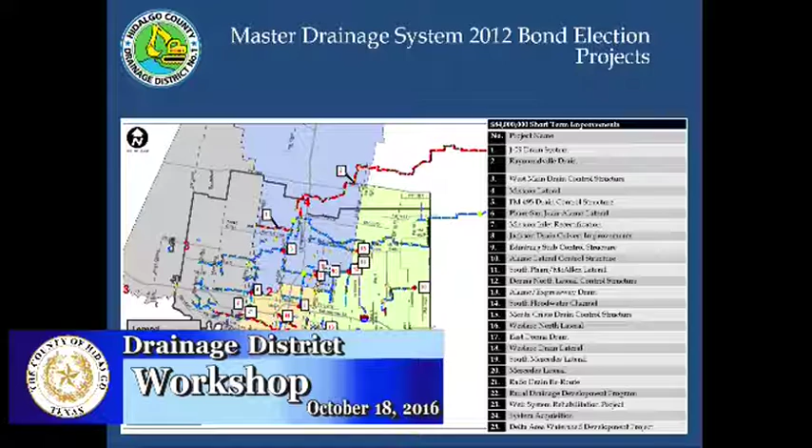This is ready to go, Chief? Okay. So the first one there talks about, it's just a slide showing the original projects that we had identified, which everyone's somewhat familiar with, Judge. This was handed out during the 2012 bond referendum that we went around, or yourself and the former manager went around and passed out. That's just a representation of all our projects that we have identified. On this, there were 25 bond projects identified, and they were district wide.

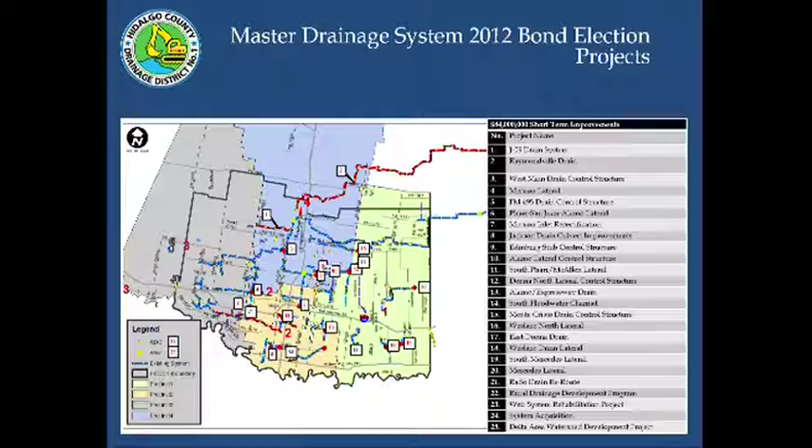The bond projects are broken down, let me talk a little bit about it before I jump into the first one. The bond projects are the 2006 project, the first bond election in 2006. Do you have the pamphlet? I don't have the pamphlet on that one. I don't know, but I think it was a binder, Judge. I don't think there was a pamphlet for the '06, but I can speak to that here in a minute. I'm going to focus on the 2012, and then I'll focus on the '06 one and some of the others we have, but my understanding is there wasn't a pamphlet done for that one. Well, if you can just provide us with a list of the projects that are going to be worked on. Of course, yes sir, I can do that.

On the 2012, we had the 25 projects identified, and out of those 25, there were sub-projects in the precinct, in the Rural Drainage Development Program, and in the Weir System Program. So we actually have a total of 44 projects ongoing at the district that are related to the 2012 bond project. So 25 was what they originally identified, and there's still 25, but there are sub-projects within rural drainage and within the Weir structures that make up 44 ongoing projects that we have right now.

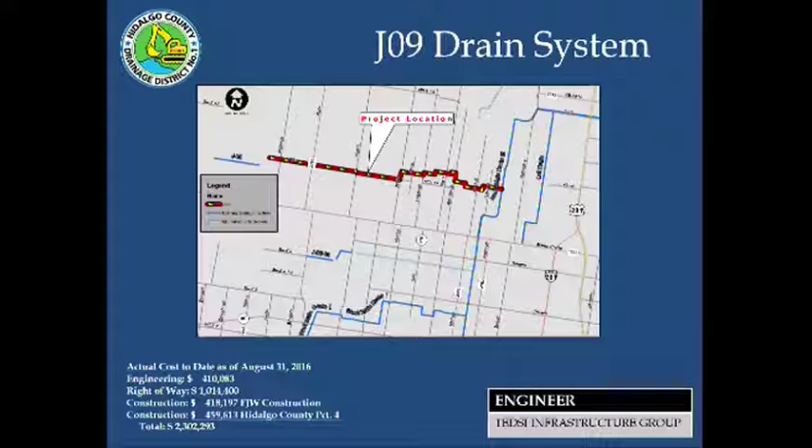Part of the extension of what I just mentioned on the storm sewer system, expanded to the existing residential development on Rio Grande Care Drive, was actually designed in-house and was added to the contractor's contract as a change order, so we have that in place now. We have definitely drainage improvements where we didn't have any before in an area that was greatly affected last year.

The next project on the list is the Raymondville Drain, which has been ongoing for quite some time now. We firmly believe this project will have a big impact on our area, directly and indirectly. Directly to Precincts 2, 3, and 4, because they'll divert water just east of where Edinburg Lake currently is, and indirectly through the diversion of these waters it will alleviate the water in our North Main, greatly impacting Precinct 1. This is a regional project that I think will bring great benefit to our area.

That project's ongoing, and it services anything north of 495 all the way up in Precincts 2, 3, and 4, which will be diverted through that junction just east of Edinburg Lake. It will have a positive impact on Precinct 1 because all those waters that would normally flow through our current North Floodwater channel would not flow there anymore, accommodating a lot of the laterals coming into it, creating more capacity in Precinct 1 for laterals that exist and some being developed right now.

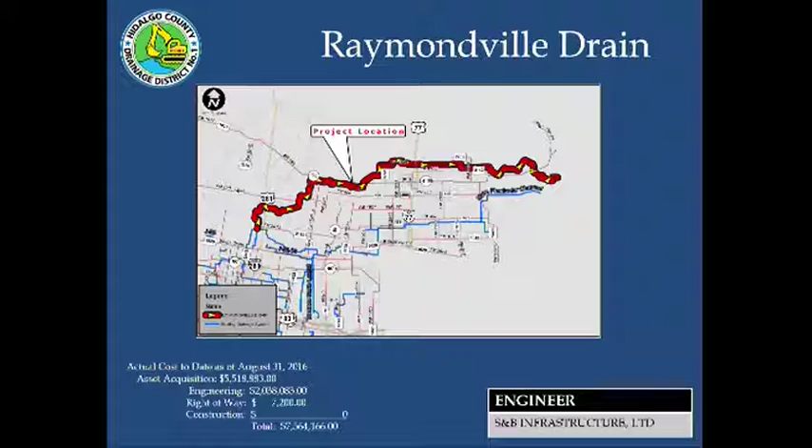It's simply a control structure that was identified on the bond to try to provide more capacity from one lateral into our main. That's basically what happened. An additional box was put in place with a gate structure, which allows a greater volume into the system, impacting the western area.

Especially the West Main Drain that I just mentioned, Commissioner, that one extends all the way west into Precinct 3. So that impact doesn't just immediately appear here in Precinct 4, it carries all the way west to Precinct 3. The more volume you can get into our main system, the better the water surface elevation - you can keep it lower to try to keep water out of the streets. That project is already fully constructed and completed.

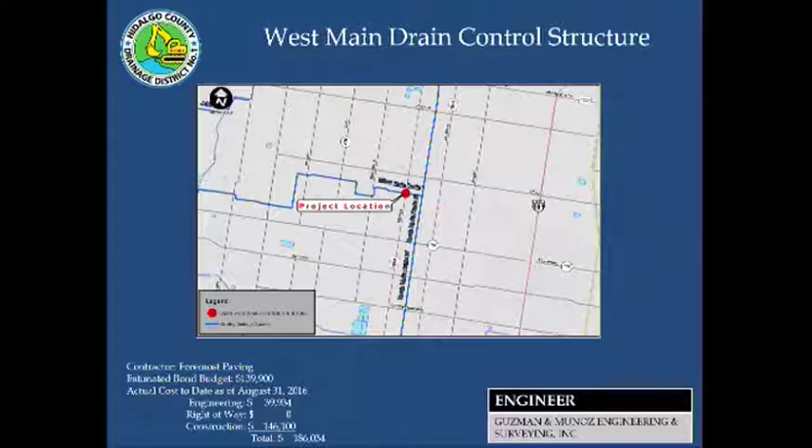Are those laterals the ones that were approved back in 1998 or 99? Oh yes, sir, we have a lot of those in place. Some of them I'll talk about under the 06, 07 partnership with TxDOT, but there were some in the late 90s. Yes, sir, some of the early ones were created way back when, especially our West Main drain that goes all the way west.

And a lot of those systems, as I mentioned - no, but what I'm trying to say is there was talk in Commissioner's Court about the laterals in Precinct 3 and Precinct 4. You believe that? You remember that? You don't remember that? You weren't here, you were working for Phase 5, I believe, back then. Yeah, I wasn't at the county back then.

But I know we do have our master plan, the original master plan adopted for some of the identified laterals. In Precinct 3, we're looking at trying to tie those laterals into existing projects we currently have under the bond issuance, or that have been improved through GLO, also projects going in your precinct right now. So that will be a priority for the district.

We're looking to invest in Precinct 3 drainage as well because there is a need - we need to expand our system into that area to get existing development out of water, but at the same time allow for future development to come in. So yes, sir, we are looking at that as well.

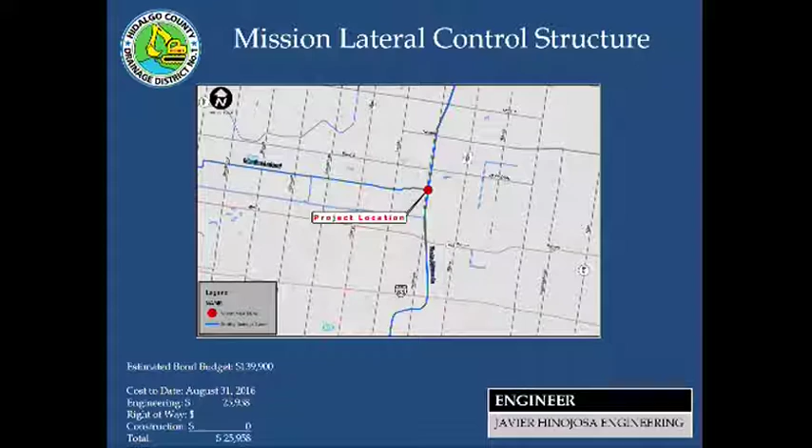So we'll move on to the next project on the list. Number 5 is the FM 495 Drain Control Structure, another control structure identified to improve the capacity of the FM 495 drain that ties into our South Main drain. They've already evaluated the improvements, and all we need is to put a backflow gate on the system since it already has the capacity of a 25-year storm, which is adequate for that area, and our main system couldn't handle any more than that. That project is being finalized and planned so we can put it out for construction.

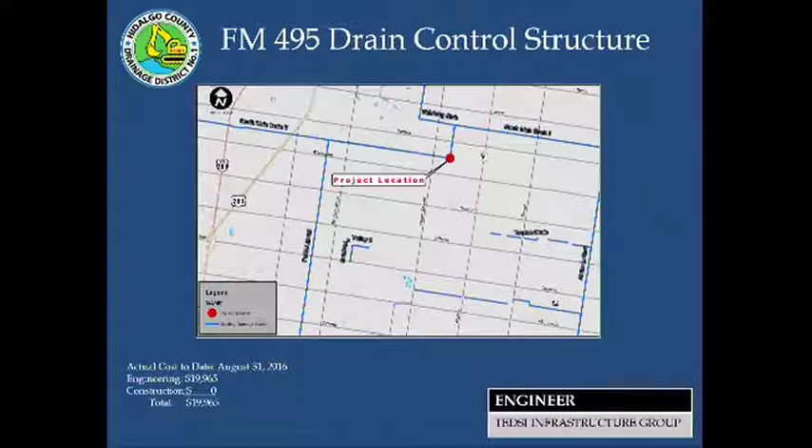The next project is the PSJ Lateral Drain Ditch Improvements, number 6 on our list. That's an improvement identified from Expressway 83 all the way north to our South Main Drain, about 4.5 miles. That project is currently under design, about to finalize so we can go to construction. The construction efforts will be done in-house to improve the capacity of flow in the drain and at the same time create more volume in the system.

That will help the areas of San Juan, Pharr, and allow more volume to be kept in the system itself. By accommodating more volume, it also helps downstream systems, because if you hold the volume upstream, the downstream systems are able to accommodate more water, which helps alleviate some possible flooding downstream as well.

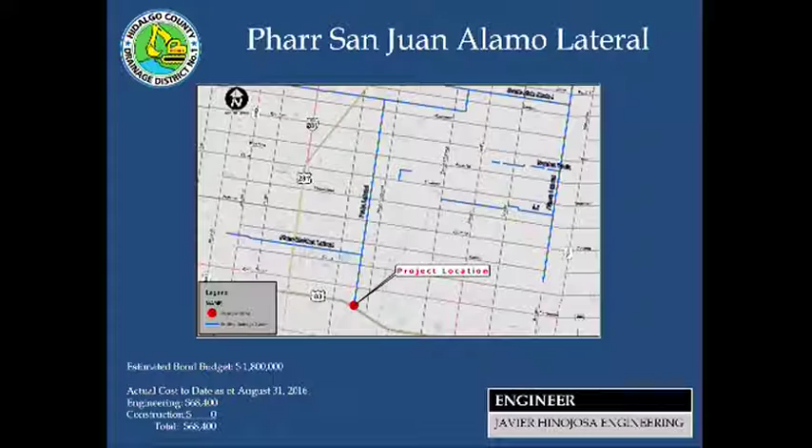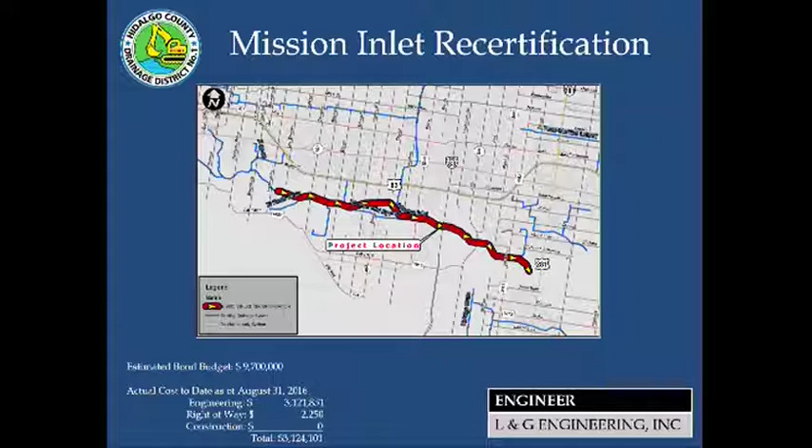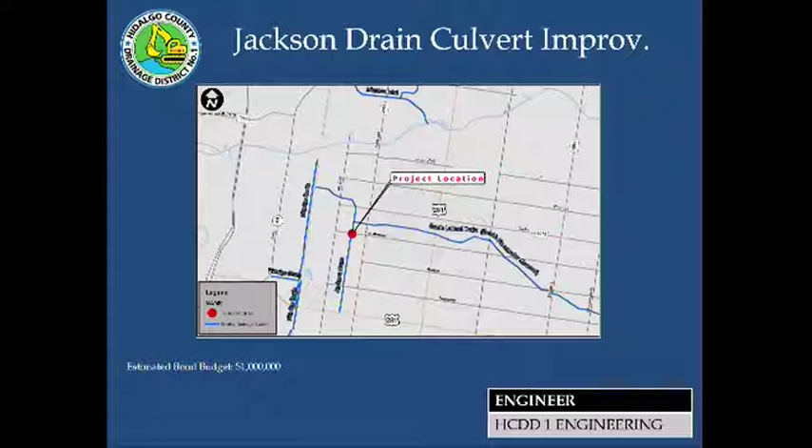We anticipate having this project closed out this coming year, and that's going to help the southern part of Pharr all the way down to 281, basically from 281 north all the way to Las Milpas. That's the south part of Pharr, the Las Milpas area, that will benefit tremendously from this proposed improvement.

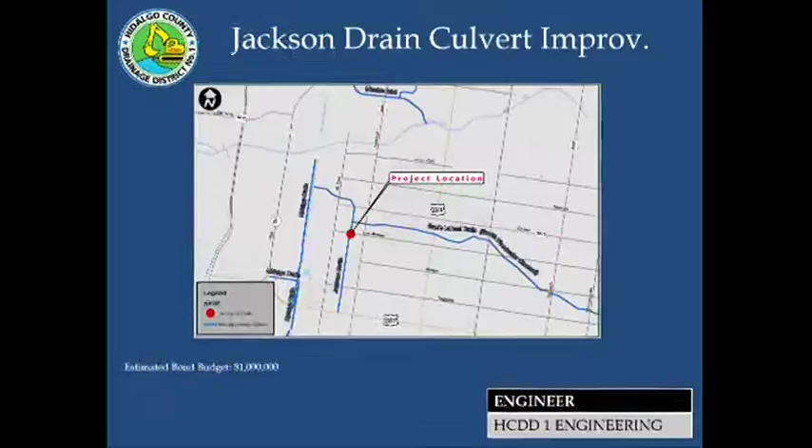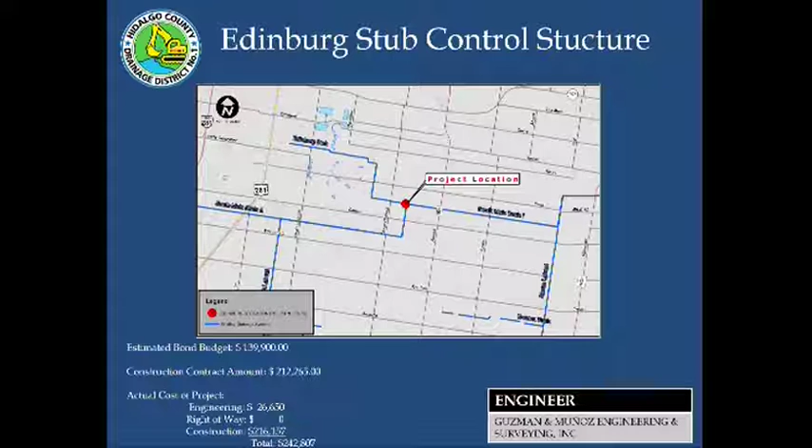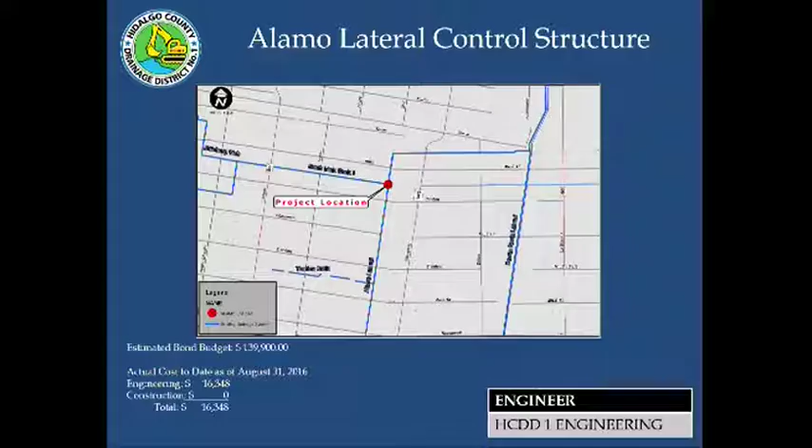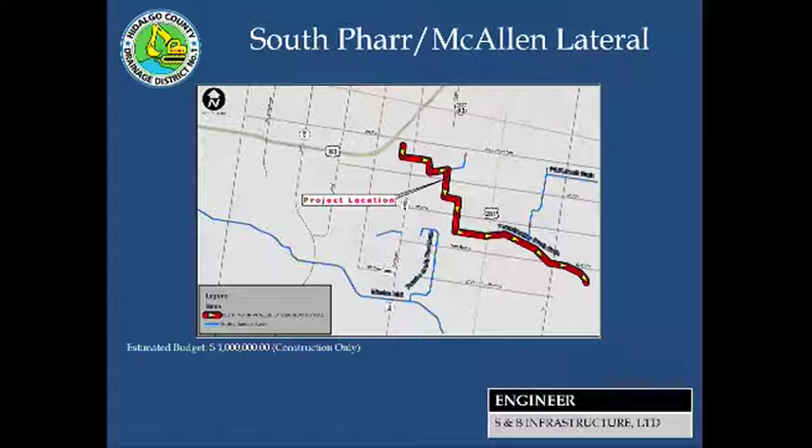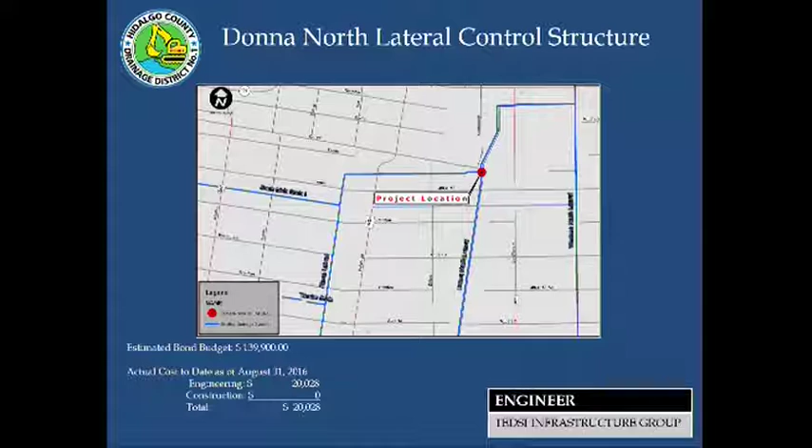Item 13 is the Alamo Expressway drain, another IBWC structure. It runs from the expressway south to the international border road, then straight south into the IBWC. This services a lot of the colonias in the southern area and rural county developments, so it'll have a great impact there. It's currently under construction and has been awarded; we're waiting on clearance from IBWC regarding the proposed gates, to make sure the specifications meet IBWC requirements. That's been submitted by the engineer to IBWC, or will be shortly, so we can re-engage the project and fully construct and finish it out.

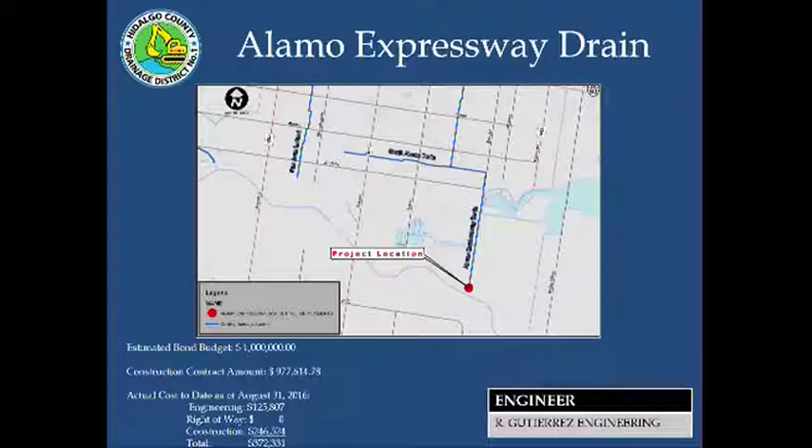The next project, number 14, is the South Floodwater Channel. This was identified as the South Fork project, along with other improvements upstream that were causing backwater issues in areas around Dicker Road and 281, including some residential areas. Part of the project was installing gate structures there, and we also partnered with a GLO project to improve the outfall structure into the IBWC. That project is fully constructed, so we're going to close it out and fulfill the bond requirements on that one.

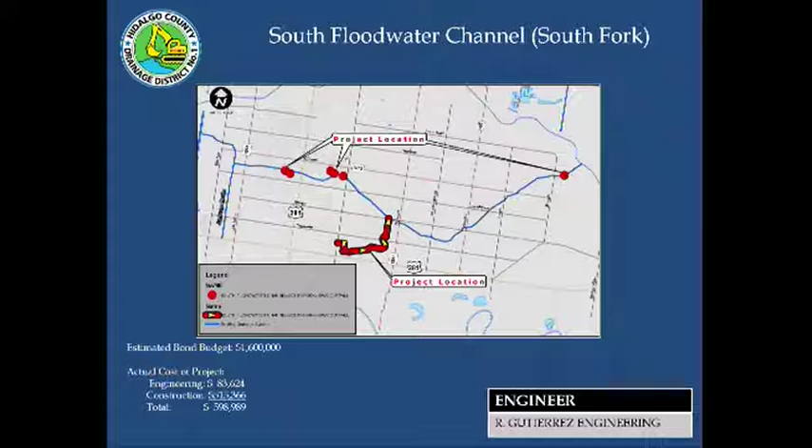Item 15 is the Monte Cristo drain control structure. The control structure will improve flow into the system itself, so we're reevaluating the size of pipe currently proposed there and looking at doing the work in-house because of the master plan for that area. There was a budget constraint when this project was initially let out, with only $139,900 allocated. The 10 by 10 boxes called for by the engineering report would require more funding, so we're considering doing this project in-house in phases, so we can have something in place to add to later and ultimately fulfill the final design recommended by the engineering report. This project should also be completed in 2017 since we're doing it in-house.

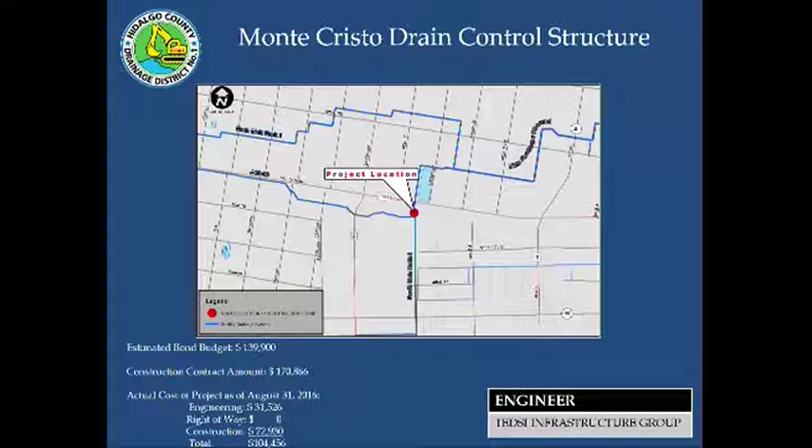Item 16 is our Weslaco North Lateral, another control structure that has already been constructed, parallel to the existing one there. It basically doubles the capacity from the Weslaco Lateral into our main, and it's fully constructed, so within 30 days we should close this project out. This Weslaco Lateral runs all the way south, draining a lot of rural area and parts of north Weslaco, so it'll have an impact on a large area.

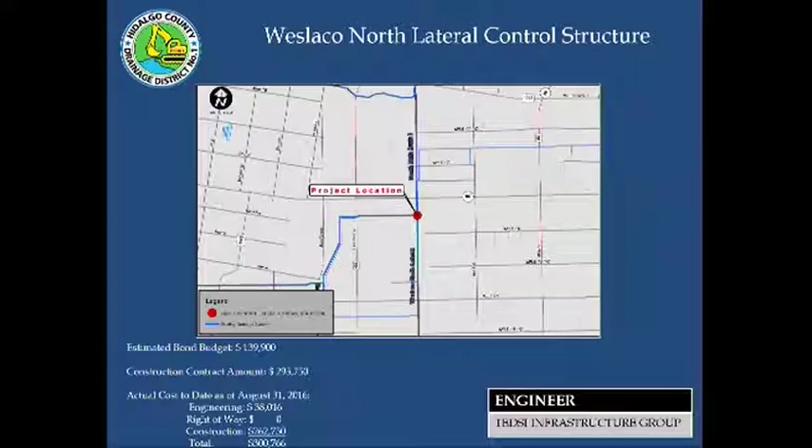The East Donna Drain is number 17. It's an IBWC structure connecting an outfall, the Donna drain that connects into IBWC. We're going to improve the structure at the actual outfall, and at the same time install platforms for mobile pumps to use whenever we have to close the gates, in case IBWC is using the floodway to divert river water.

That project's actually out for construction already, and we anticipate having this project completed by next year for sure.

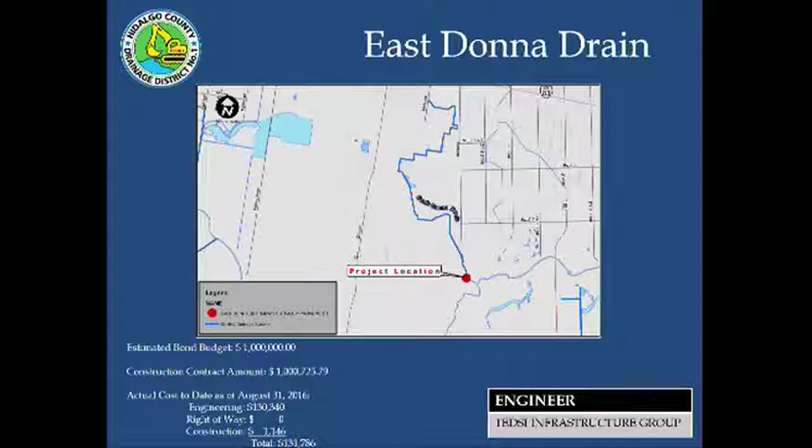The next one is the Weslaco Drain Lateral, currently proposed as a pump station to improve water flow once we close the gates. We may have to reevaluate it to see if additional structure could be installed, because this is one of the areas the City of Weslaco reached out to us about, due to issues they had last year with rain events on the southern portion. So we're reevaluating this, seeing if we need a more regional approach to accommodate an additional structure in the existing footprint of the connecting structure from our ditch into the IBWC.

So currently we're only proposing a pump structure, but the district in-house is reevaluating whether we need to modify it and put it out to bid with more gravity flow coming across the IBWC levee. We anticipate putting this out for construction next year. By the end of this year was our original goal, but based on the evaluation we may have to put it out at the beginning of next year. Either way, we feel confident that by 2017 that project will be fully constructed.

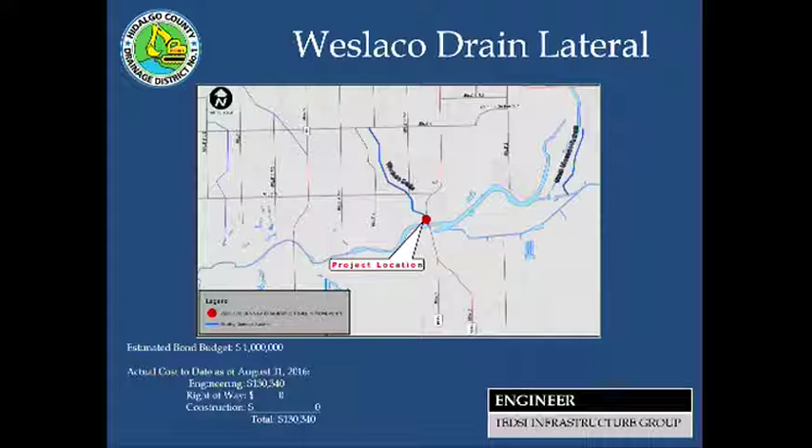Project 19, the South Mercedes Lateral, is another IBWC structure. The same thing - we're adding boxes into the IBWC for greater capacity of gravity flow, and also putting in a portable pumping station to connect pumps whenever the IBWC closes the floodway. This lateral also services the South Mercedes area, so this additional capacity will greatly help the south side of Mercedes during an event.

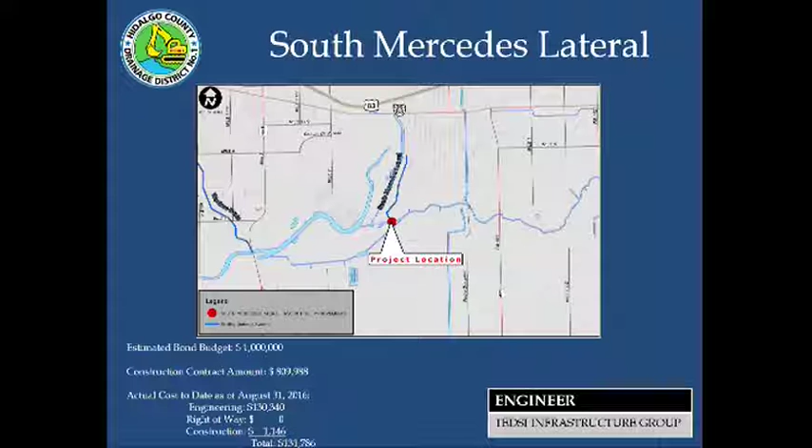That one's under construction as well, and should be completed in 2017.

The Mercedes Lateral is another IBWC structure that ties in on the east, on the north side of Mercedes, and runs all the way west and south into the northwest portion of the City of Weslaco. So it has a lot of regional impact.

We're doing maintenance and operation on this Mercedes Lateral to accommodate more drainage water in the system itself, while also facilitating maintenance of it. With this additional structure being put in, along with pumping stations for when the gates need to be closed, the gravity addition - boxes allowing for greater gravity flow - will definitely have a positive impact.

This is one of the areas where during major events, water backs up tremendously. So this additional box structure would help alleviate a lot of the issues we have after big rain events. As mentioned, this Mercedes Lateral runs all the way west for several miles, so this is a big regional impact for Precinct 1 in the rural areas, helping alleviate issues for the residential areas that connect to it.

A lot of our laterals have irrigation districts connected to them, so it's not just our main systems that are serving the area. We have a lot of irrigation laterals that connect to our main drains, and those irrigation systems service a lot of the rural areas and farm areas as well. So these improvements also benefit the residential or rural developments out there.

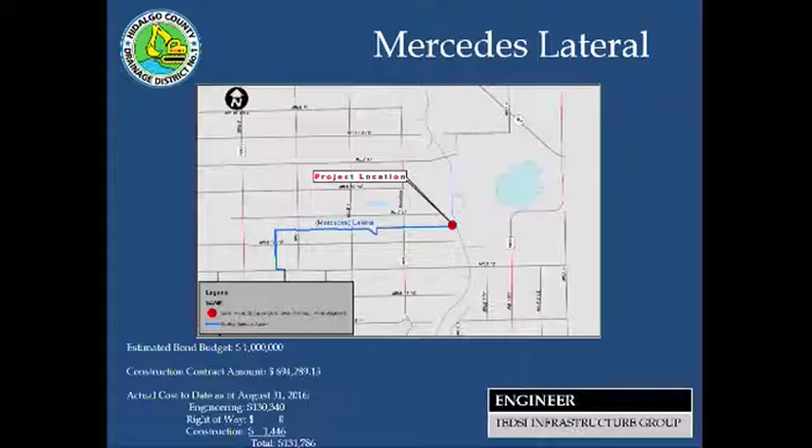Item 21 on our list is the Rado Drain Reroute project. This was initiated on the southern portion between Expressway 83 and the Mission Inlet, where there was a structure failure in that area. Because the Rado Drain serves a large portion - as I mentioned earlier - where the Mission Lateral enters east and west, just north of 495, and comes south into this area, it needed to be improved.

Because of the type of construction required, and limitations on accessibility, they went with an in-situ liner inside the actual pipe itself. That project is now fully completed, and the system is operational.

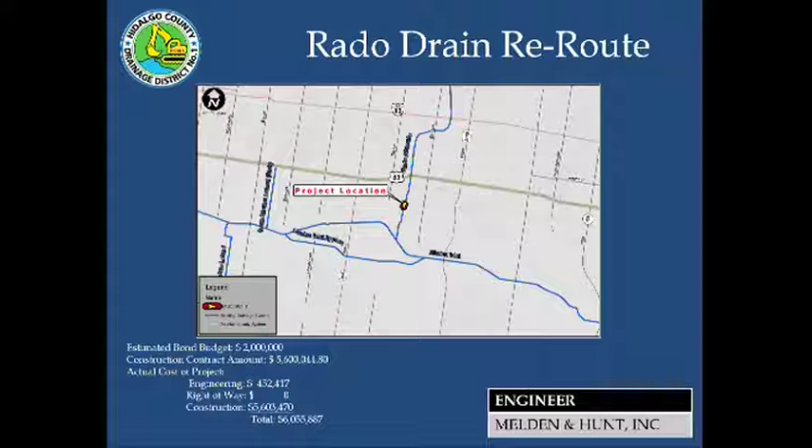It shouldn't have any issues for at least 20 years or more. So that project's fully completed.

Item 22 on the bond covers all the rural drainage projects we have, and these are the sub-projects that branch off. There was $15 million allocated for rural drainage in the bond issuance, and each precinct had an opportunity to evaluate their needs and distribute it out. Each precinct got $3.75 million to identify projects and invest in those.

Right now we're going to cover Precinct 1, which is 22A, the Adams and Black Subdivision. That's a rural development that has experienced repetitive flooding. The commissioner has paved Adams and Black, the roads, re-elevated them, and so forth. We helped assist the precinct with that effort when I was at the county. Now drainage is forthcoming to drain all that water in the areas where they've had repetitive flooding into our Mercedes lateral. That's a rural drainage project currently finalizing design, and it's an acquisition of an easement that's required before we go to construction. We anticipate having this built probably by the end of the year, if not by 2017.

The next project for Precinct 1 is Delta West. It's another rural drainage development project that also experienced flooding. We did the design in-house and put it out for construction, and coupled with Border Colonia Access money, we were able to pave the streets as well. This is a fully constructed project with outfall and drainage to a multitude of residents in that area that didn't have one before. That project's fully done.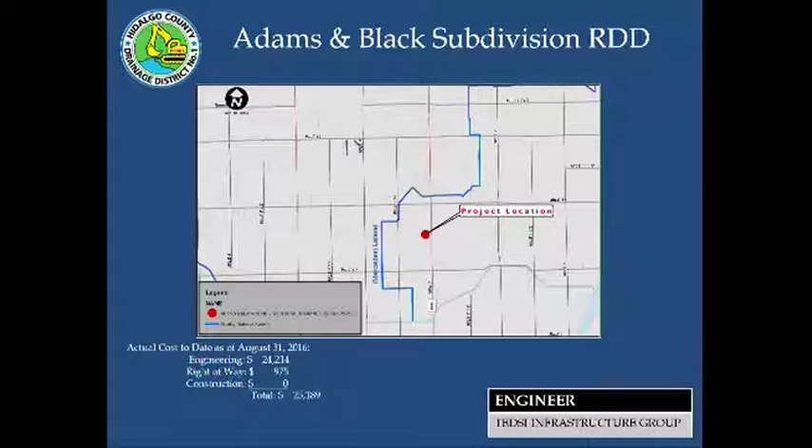Another rural drainage project is Ditch 23, a regional ditch that runs from 83 south. It crosses into Cameron County and eventually connects into the IBWC floodway. We're working with TxDOT, which is looking at improving the crossings of the ditch itself and the outfall into the IBWC. We're currently working to identify ownership of the right-of-way and to see what physical limitations we have to improve the drain that will service a lot of this area south of the Expressway.

That ditch does go north. The red ditch is Ditch 23, but north of the Expressway, it goes all the way north into part of Precinct 1, servicing some rural subdivisions in that area. With these improvements, it should provide a positive outfall for that area. That's currently being researched and prepared, and the engineering report is being developed by the consultant. Once that's developed, we'll make the determination of what type of improvements are needed to continue the project forward.

Another one for Precinct 1 is the Lucero del Norte Rural Drainage Development Program. Again, this is another subdivision that's experienced flooding in the past. We're going to be improving a crossing at our Mercedes lateral and putting drainage infrastructure in the development itself, where there's a very limited system currently. With the new improvements and the improvements in the channel itself, it will definitely help alleviate flooding in that area for that development also.

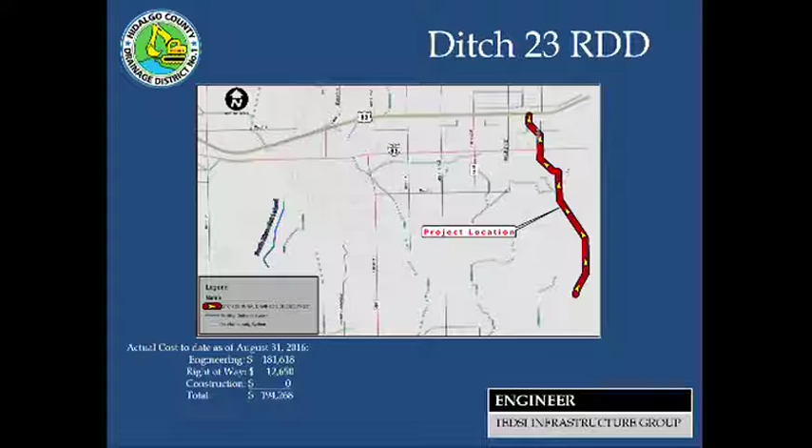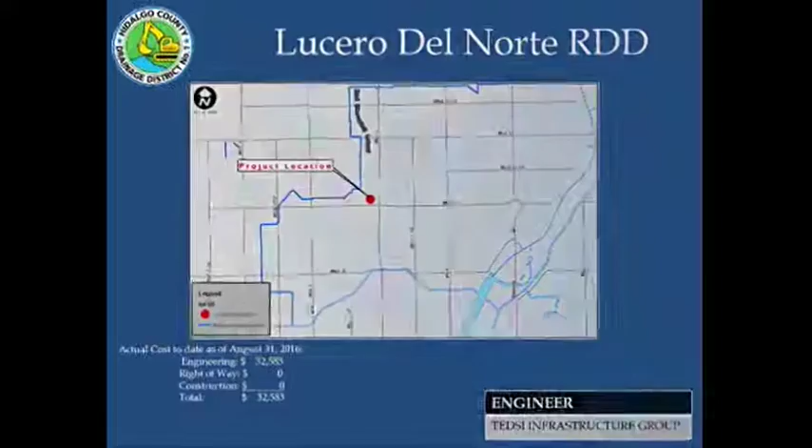Lucero del Norte is the local subdivision there, and it's been affected. The Mile 13.5 and 1015 rural drainage development area will definitely alleviate the flooding with the improvements we put in place.

We are also developing plans for an internal street funded by FEMA with recovery monies received by Precinct 1. There's a partnership in place to improve not only the drainage but the streets in that rural subdivision that has had repetitive issues.

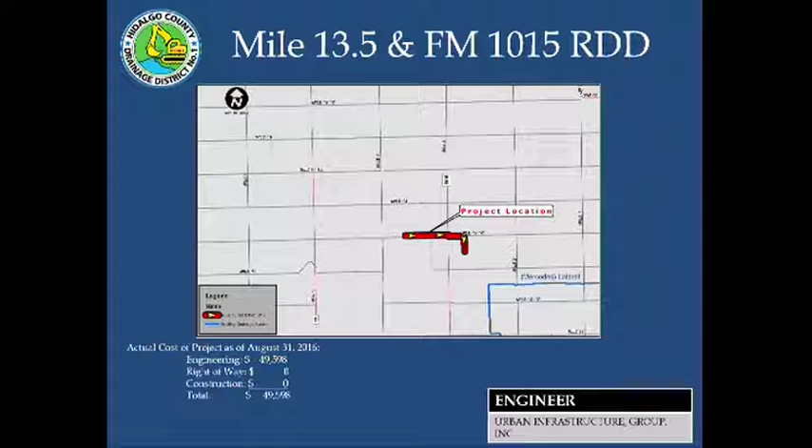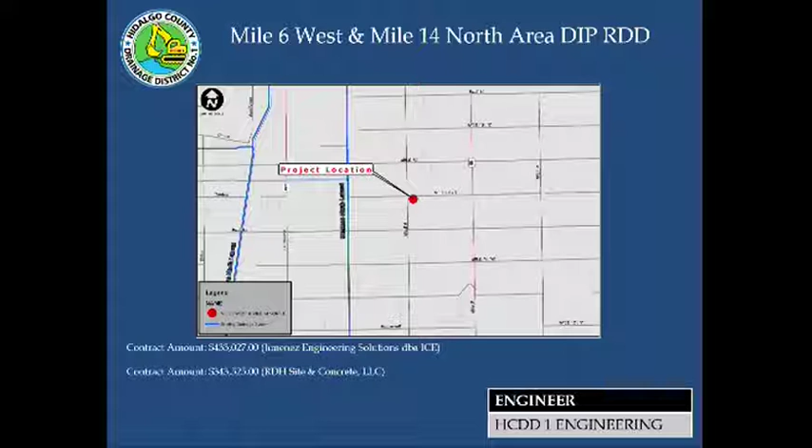The next one is mile 6 and mile 14 North Area Drainage Improvement Project. Again, this is another area that was greatly affected during previous events, and we're currently under construction right now. Once that system's been put in place and the improvements downstream are conducted, partly by the contractor and partly by the district, it will definitely help alleviate a lot of the flooding in the area. Currently the system they have in place is inadequate. With the new system, they should see minimal flooding in the streets in that area as well.

The next project that we have, rural drainage for Precinct 1, is Old River Road. Again, it's another area that was heavily hit during the last event. It's located on the south side of Donna, and that system does eventually connect into our South Donna drain, where it connects into the IBWC structure that is part of the bond issuance being improved right now. We're looking at the need to improve certain crossings. The engineering report is being developed by the consultant, and once that report comes in, we will evaluate what crossings need to be improved and either seek funding or perform some of those in-house to alleviate the flooding. So several rural subdivisions in the River Road area that were greatly impacted will be in a better position once we put in the drainage system for this area.

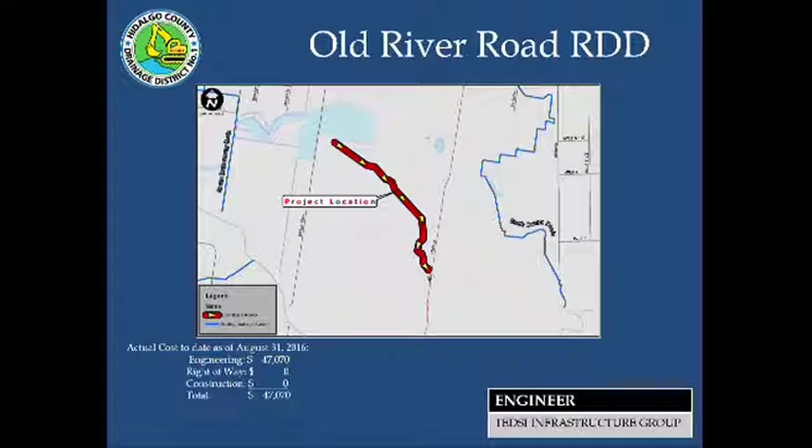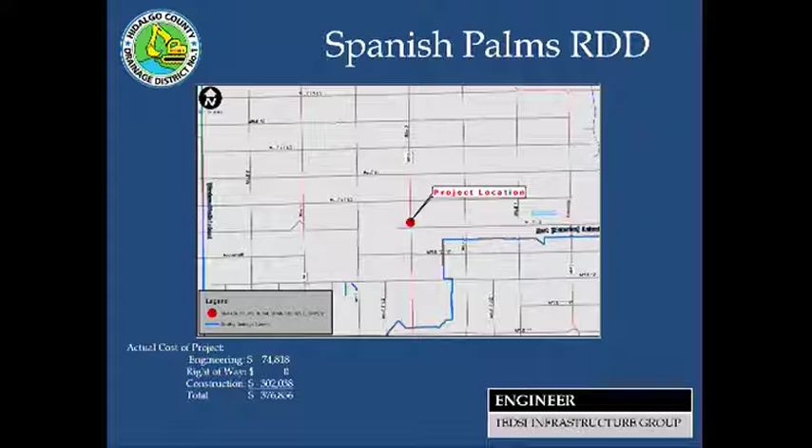The next one we have, rural drainage in Precinct 1, is Spanish Palms, and that one was actually a two-part project. Part of it was external, an outfall line that was run from Spanish Palms to an irrigation district ditch that connects to our East Mercedes lateral. Part of it also was internal drainage put in the subdivision itself, coupled with the improvements that Precinct 1 funded for the streets. The district provided the drainage improvements for it. So now this development, which in the past had a lot of issues, has a positive outfall to a drain ditch. That project is fully completed as well.

Tijerina Subdivision, Precinct 1 again, is another rural drainage project, and this again had experienced issues in the past. So the drainage has been put in place. There did not exist any drainage before. Not only that, but also coupled with the Border Colonia Access Program funding, they were able to pave the streets as well. So now the development has a new drainage system and new streets as well. That project is fully constructed.

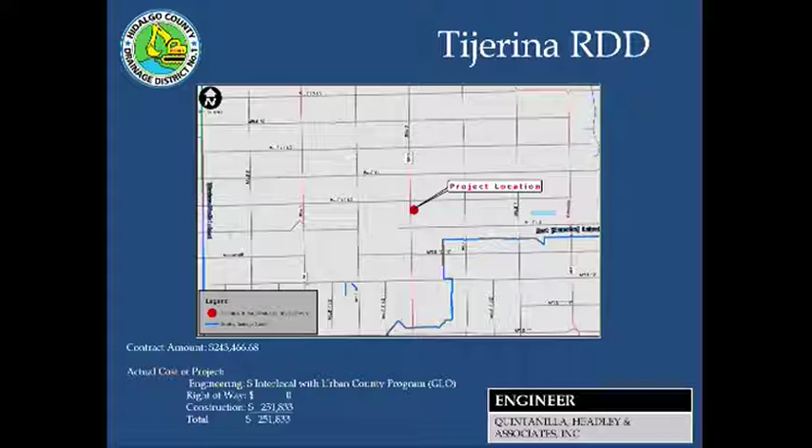Northside Village, now we're moving to Precinct 2. This again was a rural drainage project that is fully constructed as well, and it was an extension of the drainage system from the Eldora area all the way into what we call our Cesar Chavez Drain that flows east. That's fully in place already.

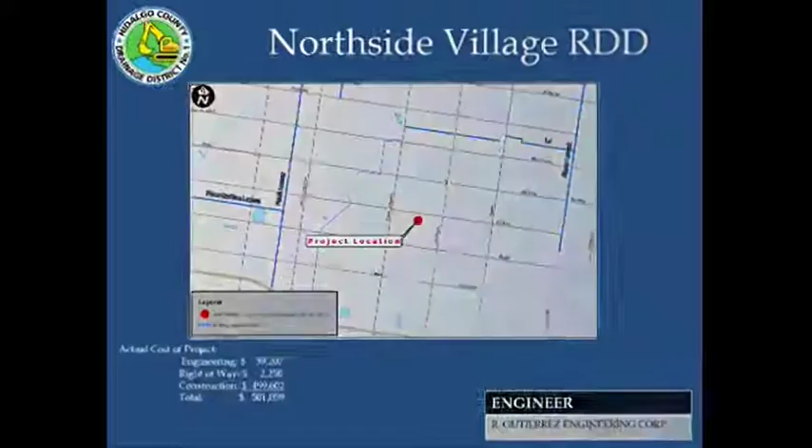That's fully constructed already. The next project in Precinct 2 that we have, rural drainage, is the Seminole Valley, and that's another project also. It's a pipe system that was improved from Owassa into our LJ drain, and that's also fully constructed. That sets up in place to be able to connect areas that in the past had flooding issues with a new improvement, coupled with the improvement of the ditch itself, will provide relief for these residential areas.

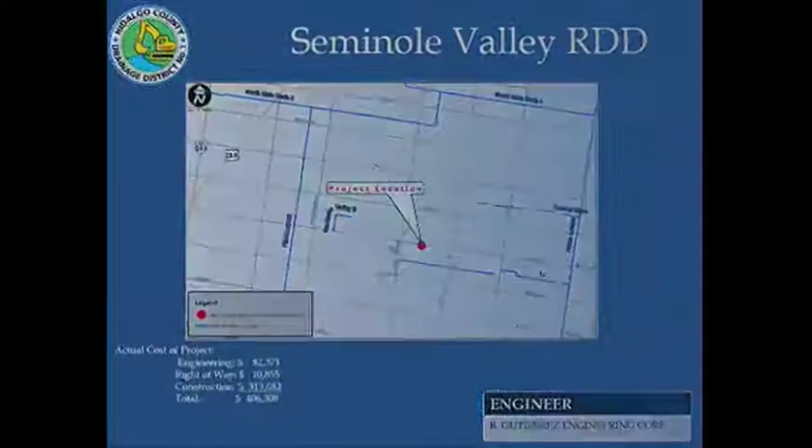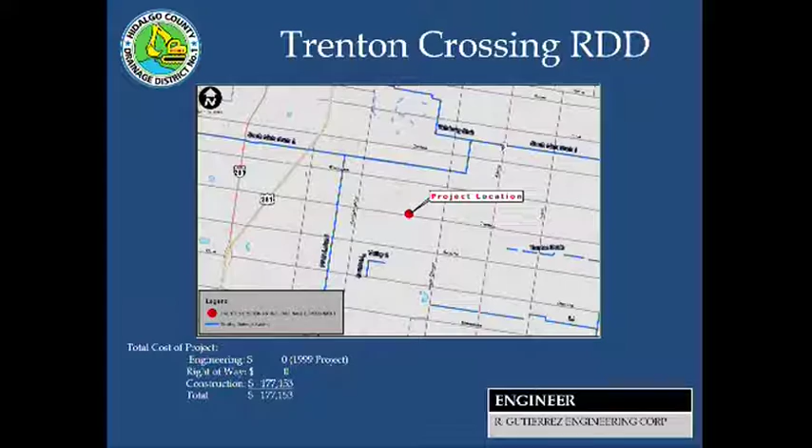The next project is the Trenton Crossing, again Precinct 2, and this is part of the FM 495 drain. This drain, if you recall, also has a control structure going in at the South Main drain. It's a project that's identified. But this Trenton Road crossing and the Wisconsin Road crossing, which is the next one as well, these two crossings are rural drainage for Precinct 2 that improve the crossings at said locations, Trenton and Wisconsin, for the 495 drain, so we can get that water eventually into our South Main. Those projects are fully constructed as well.

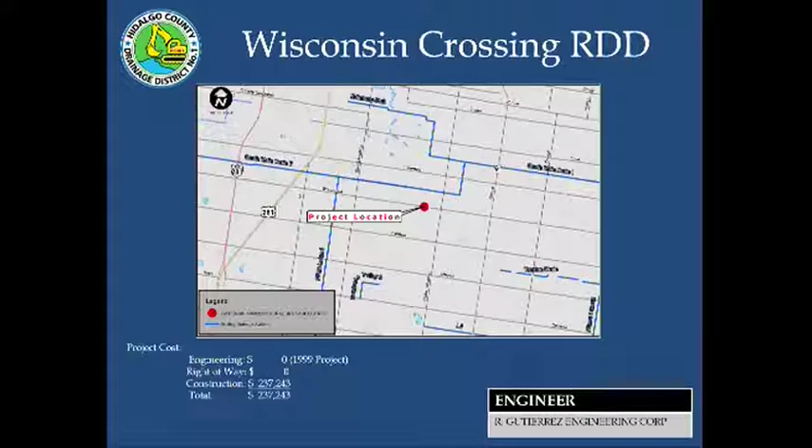One project, and I apologize, I don't have a slide for this one. We have our Minnesota and Cesar Chavez drainage area improvement for Precinct 2, which is a big area. That's a project currently under design right now, and that's going to help about 5 to 6 subdivisions that in the past have experienced flooding in the southeast corner, northeast corner of Minnesota and Cesar Chavez, and the southwest area of Minnesota and Cesar Chavez.

It's a needed project that is currently under design right now to put in storm sewer systems and take it north into our existing LJ drain. So those projects are being developed, and I apologize we didn't put a slide in here on it, but that's a rural drainage development project that's ongoing right now for Precinct 2. So that's going to have a great impact to that whole intersection. I don't know how many residents are being impacted off the top of my head, but it's several subdivisions. I believe there are about 6 subdivisions being impacted in their area.

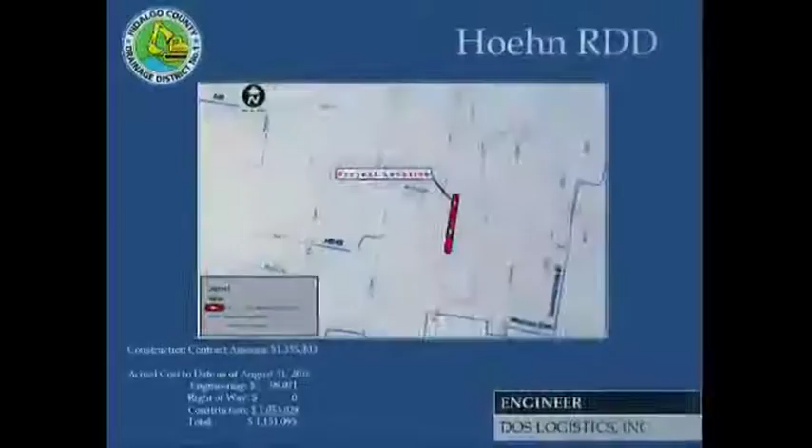So let's go back. In Precinct 3, we have the La Joya Watershed, which is a rural drainage project. This project is a major project in the west end of our county. The La Joya Watershed is about 25 square miles, and we've developed a plan to further improve drainage in that area.

Currently, there is construction of our southern detention basin south of Expressway 83. It's 70-plus acres purchased by the county, and it's being constructed by the county. Eventually, the district will take over. But that's the first start of the La Joya and Peñitas area watershed improvements.

A lot of improvements are going on in this area. We also have the Mile 3 improvements, Liberty Boulevard improvements, and our TxDOT La Joya bypasses ongoing. So all these improvements I just mentioned will eventually discharge into the current detention area being constructed south of Expressway 83.

We do have projects in place right now, plans going to construction for our Liberty Boulevard pit, that will be constructed to catch all the water coming in from projects being developed by General Land Office funding. We're also going to be improving the Peñitas Drain, another General Land Office project funded by them for design and construction.

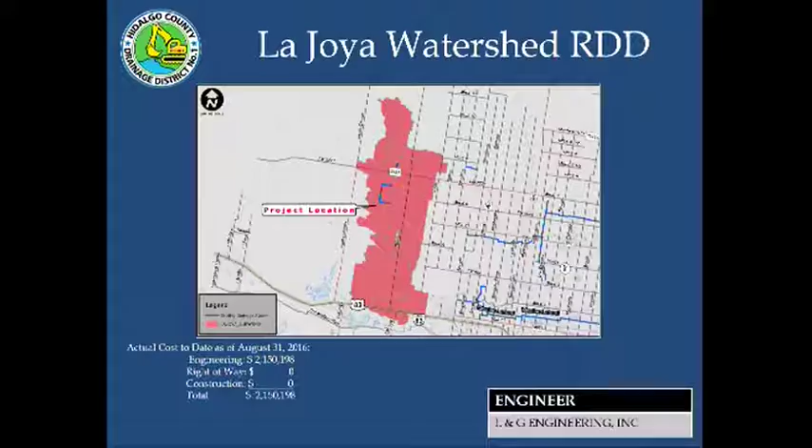Hoehn Rural Drainage Development Program is one in Precinct 4. This one's under construction currently, and it's from Hoehn all the way to our JO8. This area, Hoehn Road, or the rural drainage Hoehn, has experienced tremendous flooding in the past. So this project is in place, and we're about 95% complete.

With all this improvement in place, there's no need to have a pump structure anymore. We had a pump structure on the southern portion of Hoehn, a detention area that held the water, then we pumped it. But now with the gravity line installed, a 54-inch line for that area, it drains Hoehn in the region as well, providing positive outfall into our JO8, which is also being improved by the district. So then we'll have gravity flow for the whole system, a big improvement for this area. That project's almost fully completed.

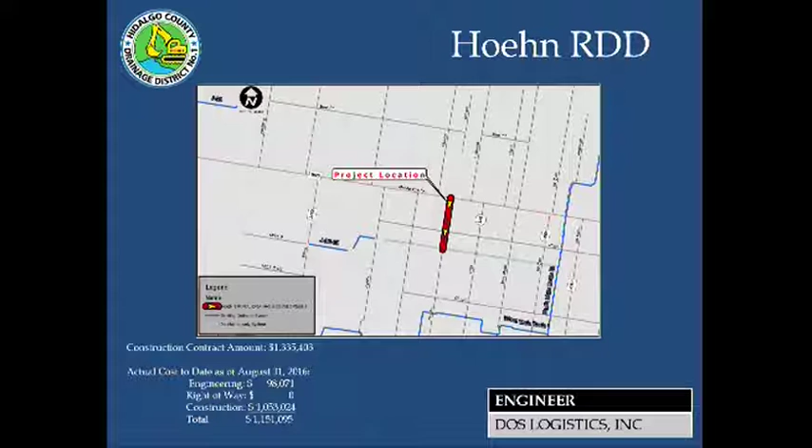Precinct 4 North Seminary Estates is another project that in the past had experienced issues, up the north side of Edinburg Lake, around Seminary Road. That area in the past had many flooding issues, with improvements of the storm sewer system and the improvements the drainage district has performed in that area, plus some bypass channels we temporarily put in place. During the last event, there was minimal flooding of the residents, which is a big positive.

Being that it's a very low natural area, but we didn't have any impacts in the last event.

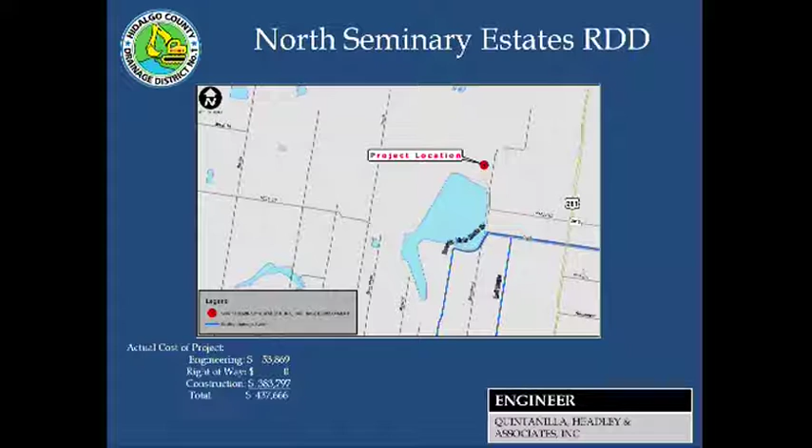Precinct 4, another one, rural drain is the Trenton phases 2 and 3. Currently, the Trenton Drain exists all the way to Alamo Road, and the plan is to expand that drain west.

Into areas that were heavily hit during the last May and Father's Day event. The areas in red were the ones that we're looking to impact. Currently, that's being evaluated in-house to determine the approach to take. We may have to develop a linear detention ditch just west of Alamo Road.

We're exploring the possibility of taking the water north instead of east. But that's ongoing, and once we determine that, by next year we should be generating plans and get it out for construction. Part of it will probably be constructed with in-house forces, coupled with the Precinct 4 forces, and part of it may be bid out as well.

So we've been working with Precinct 4 on this project because we know this area was one of the ones that was heavily affected during the last event. Precinct 4, another one.

Another project on the list is number 23, the main floodwater channel weirs, and 23A is weir number 4, which is on our main floodwater channel, and that's one of the weirs that was identified to evaluate and improve. So we received bids, and they were a little bit on the high side.

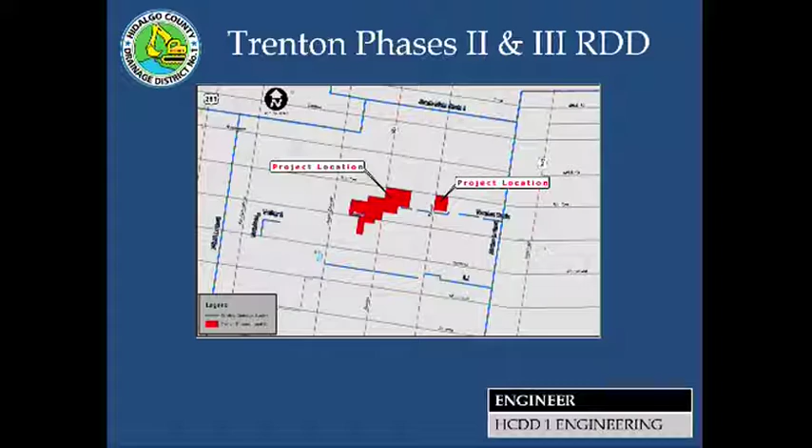We received those bids about 4 or 5 years ago. So I've gotten with our consultant, and we've evaluated the actual status of the weir itself. It appears that the weir has been doing well over the last 4 years. So we're looking, with our consultant, at the possibility of doing some riprap and shoring it up ourselves with in-house forces so we can close this project out.

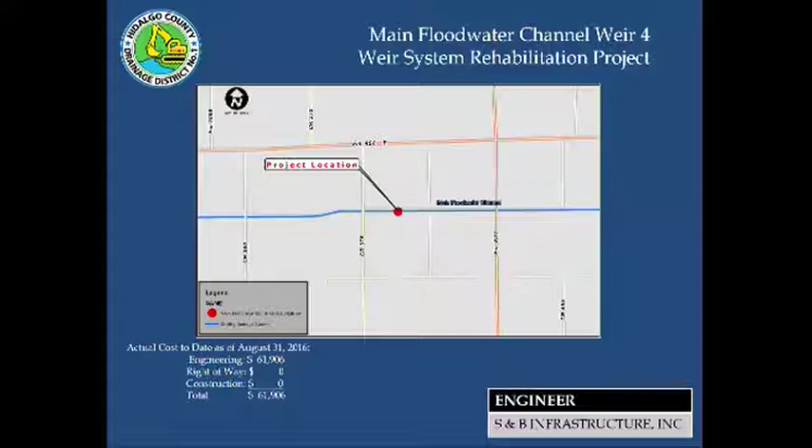Weir number 5 is also another weir in our main floodwater channel, and for lack of knowledge, weirs are just basically control flow. They control the water flowing downstream, that's basically what it is. A lot of these are put in because of elevation difference, so we don't just push everything downstream. It's basically a way to control water through our channels.

And this weir has already been fully rehabilitated, and it's in place. It's fully constructed or repaired.

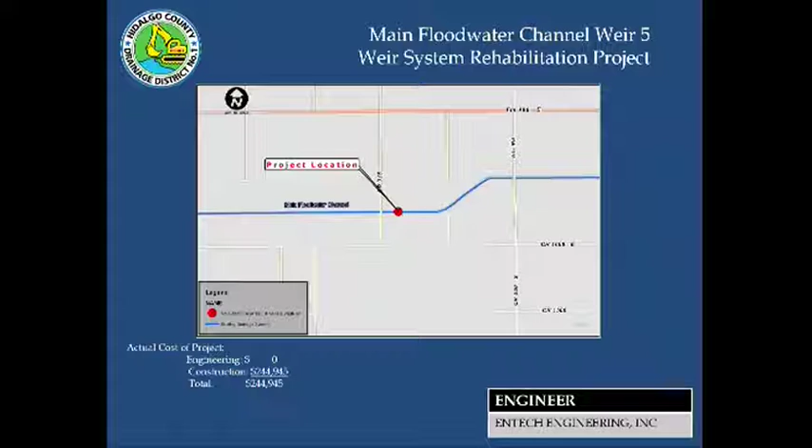The next one is North Main Drain Weir 3, and that one is on our North Main Drain right before it gets to our main floodwater channel. That one's also fully constructed, and again, it was just some riprap and repair on the weir itself.

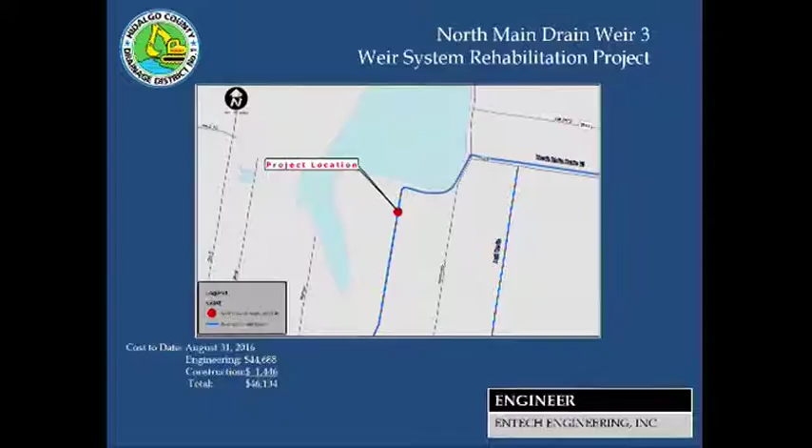The last one we have is our Delta Area Watershed Development Project, project number 25, also known as the Delta Region Water Management Project. This one is a regional project because it has to do with our main floodwater channel on the north side of our county. The project here is to establish reservoir areas for drainage and floodwater detention, but also it's a reuse project.

We currently have our application pending before TCEQ for approval to extract water, treat it, and resell it. We're coming up pretty soon on the deadline, I think this month it expires, or we have a 30-day public comment period ending. Traditionally, once that ends, depending on the comments we receive—but we haven't received anything that I'm aware of that has been conveyed to us regarding anything against the project or so forth.

Once that comment period ends, they'll move to issue the actual permit and license so we can extract water, which is a big project for us because we'll be the only one in the state that can extract water out of our system, store it, treat it, and then resell it, either for further treatment to other water suppliers or to irrigation districts.

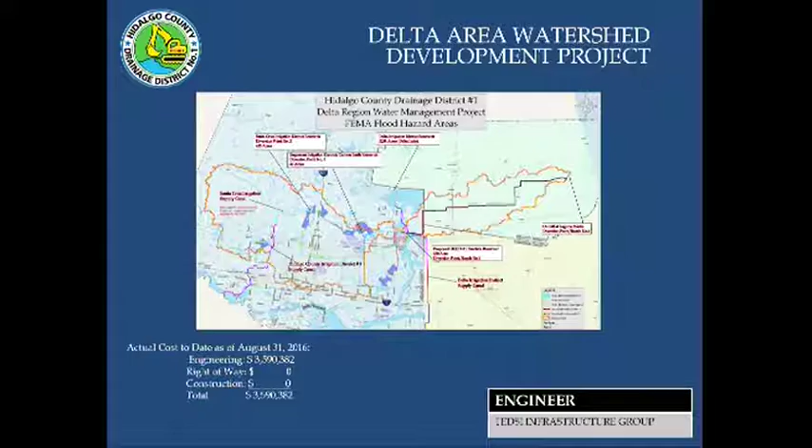Just on the last one, Raul, I know we preset some bonds. Here it shows total engineering, but I think there's a balance. Did we preset for the Delta Region 10 million, or how much was it that we set aside? We had 10 million, right? We have, yes. Okay.

Just a comment, obviously the Water Development Board has been a source of funding for both Delta Region as well as the Raymondville Drain. We've worked cooperatively together between both projects. Both have significant benefits, and I know the court has been committed to advance both of those projects. So just want to commend the court and yourselves to see that through, because it's critical. Both projects are just as critical.

Oh yeah, yes sir. And as I mentioned, the Raymondville Drain is definitely a big project for us. It'll help a tremendous area on the west, and this project as well will help us not only the west but the east as well. So yeah, both projects are instrumental for our regional drainage needs that we have in our county.

And that's the 2012 overview that we currently have right now. I know the judge asked about the 06, 07. We do have certain projects in the 0607 that were identified. The Raymondville Drain was one that was identified. Obviously, that's an ongoing project.

The Mission Inlet Bypass is a completed project, so that one we can close out. The Monte Cristo outfall is still ongoing. Actually, we have our control structure that I mentioned here, that's part of it as well. There is a need to look at improving some of those crossings on the Monte Cristo outfall to be able to fully complete the intent of the 06 bond.